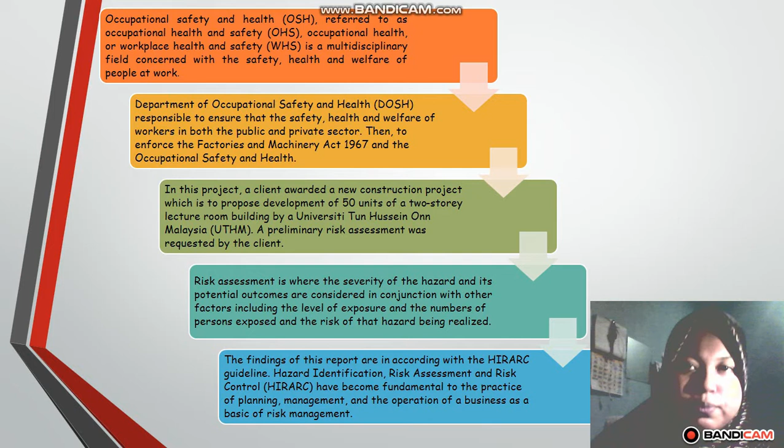Next, what is mechanical plant and machinery? The difference between plant and machinery is that generally machinery will have moving working parts while plant will not. So the proper selection and planning of equipment is important for timely completion of the project within plant cost

and for increasing profit and margin. Using machinery and work equipment exposes workers to multiple risks. Ensuring machine operator safety requires measures as effective as possible for the workers.

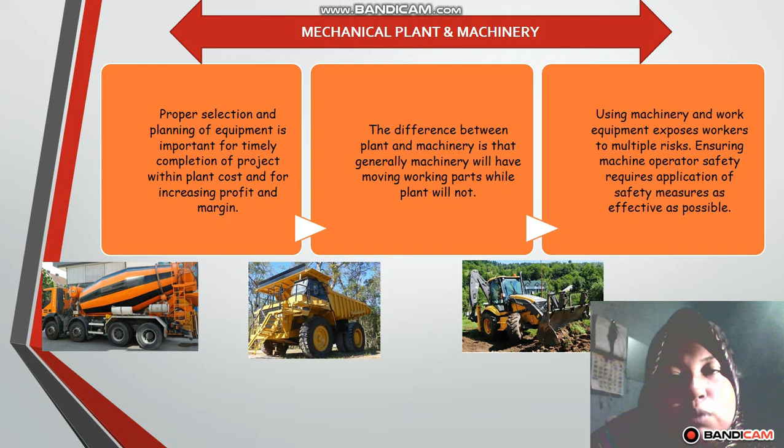So, next, the objective for our project has 3 parts. The first part is to identify the type of safety and health hazards that can be found in a construction site for mechanical plant and machinery. The second part is to provide a preliminary risk assessment of identified safety and health hazards. The last part is to recommend the appropriate risk control to ensure the safety and health of workers.

Okay. For our project, the problem that we found is that a wide range of mechanical equipment is used within industry. Examples include power presses, cutting tools, planers and routers.

There are significant risks associated with using machinery and equipment, and injuries sustained because of unsafe use of plant tend to be severe. With better preliminary risk assessment and risk control in accordance with the hazard identification, risk assessment and risk control (HIRARC) guideline, hazards can be recognized, controlled and incidents in the workplace reduced.

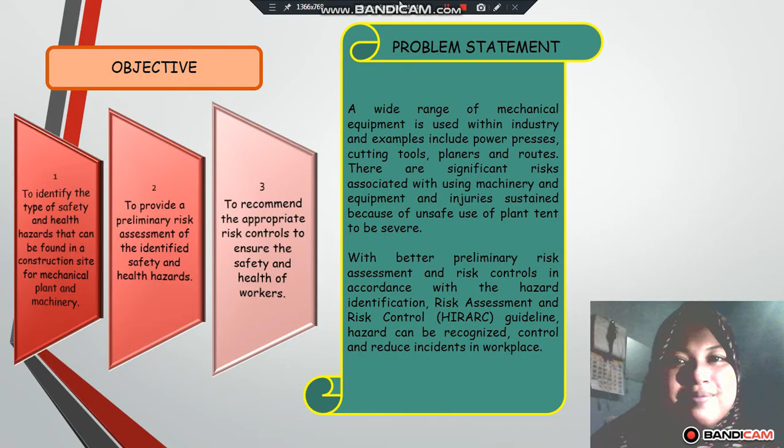I would like to explain about heavy equipment inspection. So what is heavy equipment inspection and why is it important? Heavy equipment inspection is a process including manual, mechanical and computerized systems which inspect whether the components function properly to the specification. Why is it important? Because it prevents accidents and injuries occurring in the construction site.

Moreover, it will identify whether the machinery is in good or bad condition before the start of the project, to keep workers under safe conditions, and finally to keep the working environment in good condition. The working place is stable and no accident occurs.

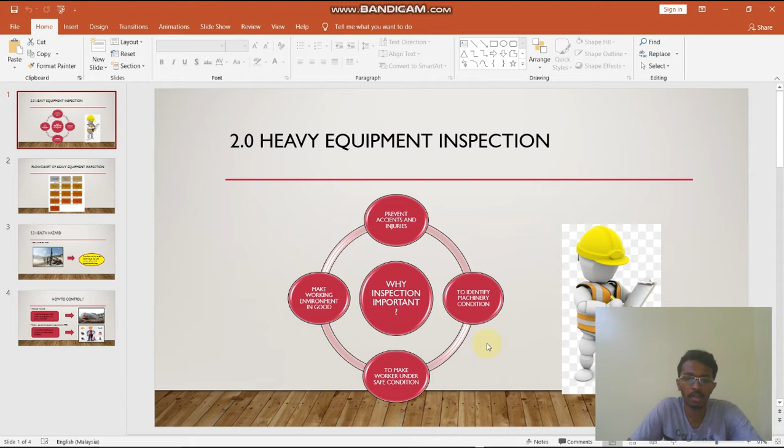So next I will explain the flow chart of heavy equipment inspection. Machinery inspection is very important and crucial before starting any project. Without a proper inspection, the machinery will not be safe to use and can cause injury or be fatal to humans due to accidents. This flowchart shows some steps of inspecting machinery before and after.

These are some examples of the inspection before and after. Look around the machine for visible leaks, inspect the tires, check the fluid levels, remove any dirt, check hydraulic pressure, hand over to the operator, check the operator controls and warning lights. So when conducting an inspection, we need to consider all problem causes to avoid any problem occurring in the construction site.

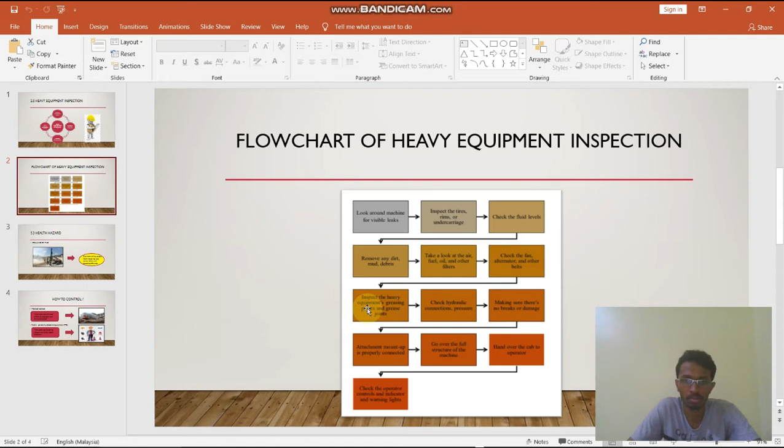So I'm going to present about the methodology of project part 3.0 until 3.5. So we are going to start with the risk management. The basic principle of risk management is to integrate risk management as part of planning at all levels of business, accept no unnecessary risks, make risk decisions appropriately, and manage the risk.

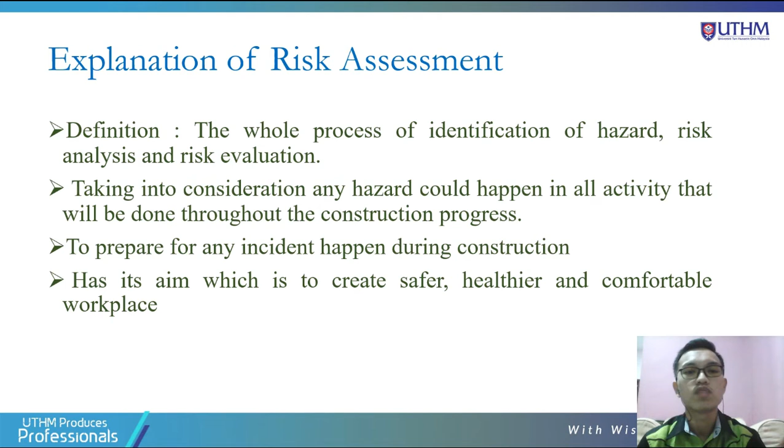Second part is the risk assessment. Risk assessment is the whole process of identification of hazard, risk analysis, and risk evaluation, taking into consideration any hazard that could happen in all activities done throughout the construction progress. Risk assessment also is to prepare for any incident that happens during construction. It also has an aim, which is to create a safer, healthier and comfortable workplace.

This is the general flow of risk assessment. Step 0 is the preparation for risk assessment. Step 1, hazard identification, creating accident scenario. Step 2 is the risk estimation, which is considered in the risk analysis. And then, is the risk acceptable? If yes, then we can summarize the risk assessment. If the risk is not acceptable, then we need to develop risk control operation and study the assessment of risk control operation.

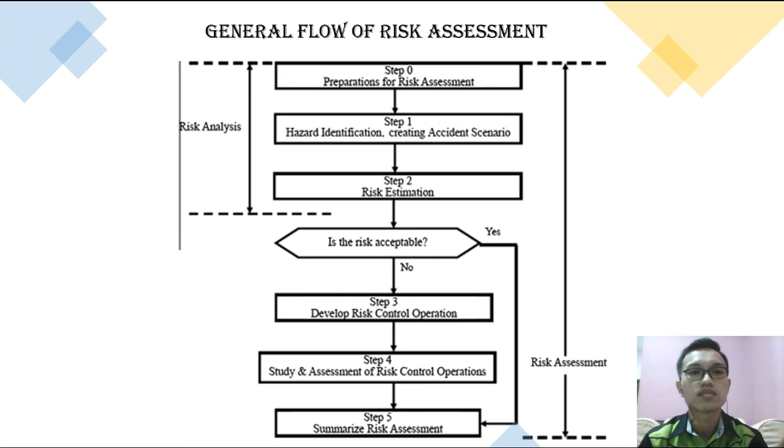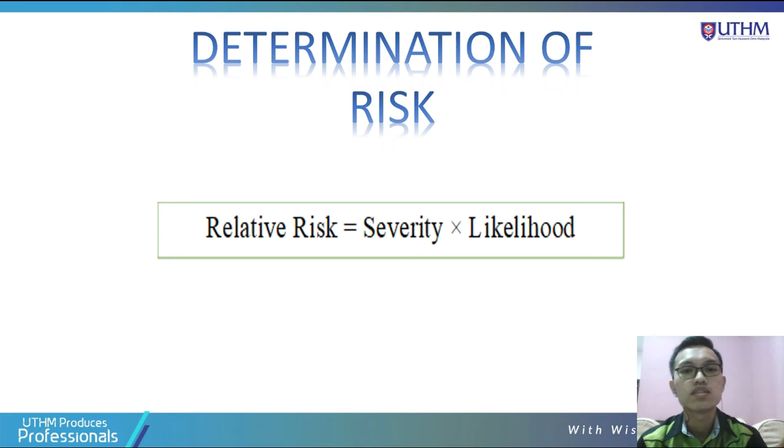Next part is the determination of risk. This is the formula to determine relative risk: risk is equal to severity times likelihood. The next part of this methodology is the severity of risk. The severity consists of 5 parts, which are catastrophic, fatal, serious, minor, and negligible. For example, a catastrophic event is numerous fatalities, irrecoverable property damage, and productivity loss. The rating is 5.

And then the likelihood of hazard. Likelihood is the chance or possibility that an event will occur. Likelihood is ranged by 5: most likely, possible, conceivable, remote, and inconceivable. The example for most likely is the most likely result of the hazard or event being realized, with rating of 5. Possible has a good chance of occurring and is not unusual, rating of 4.

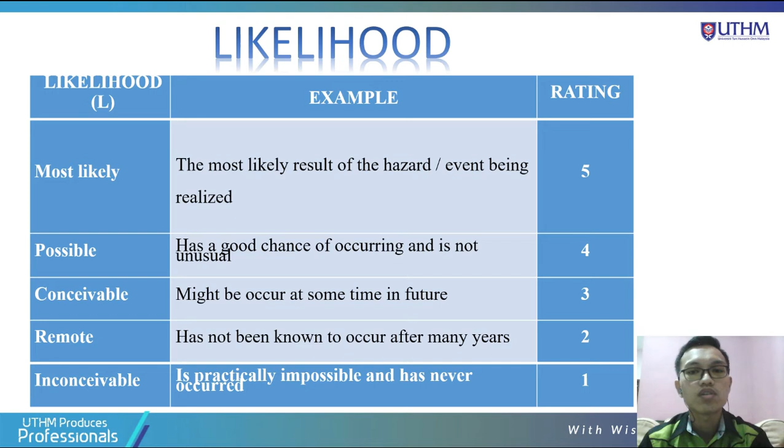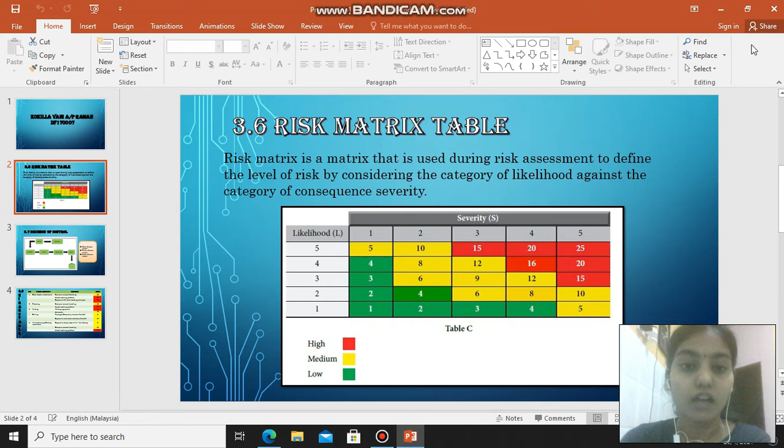A risk matrix is a matrix used to define the level of risk by considering the category of likelihood against severity. The value is gained from multiplication of severity and likelihood. The range of 1 to 4, which is green, is identified as low, and further reduction may not be necessary. For the range 5 to 12, which is yellow, it is identified as medium risk, which requires a planned approach to control the hazard and apply temporary measures. For the range 15 to 25, it indicates high risk, which requires immediate action to control the hazard.

For the decision of control, the decision process is where risk is a dominant issue and planning does need to have a guideline on the tolerability of risk. Usually, the design of control will refer to the guideline from here. There are 3 ways to control the risk. First is most effective control, which is elimination of hazardous jobs. Second is fairly effective control, which is substitution, isolation, and engineering protections. Third is least effective control, which is administrative control by changing the procedure, or PPE use as additional protection.

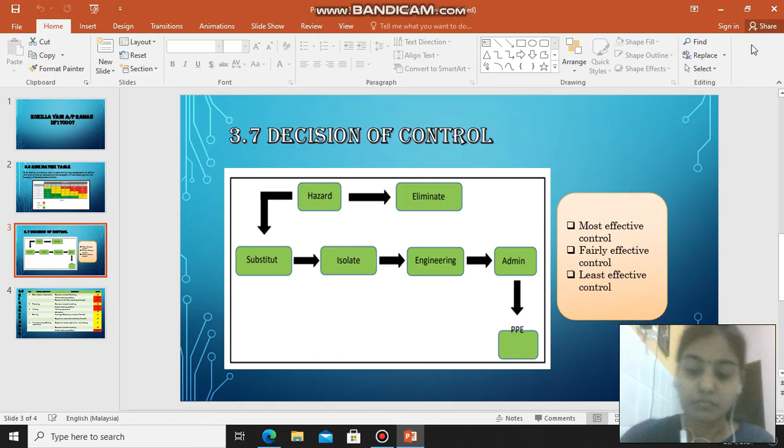In this project, we have identified a few work activities that cause hazards to humans. The risk level has been identified. All the risks are in the range of medium and high, which require planned and immediate action to control the hazard.

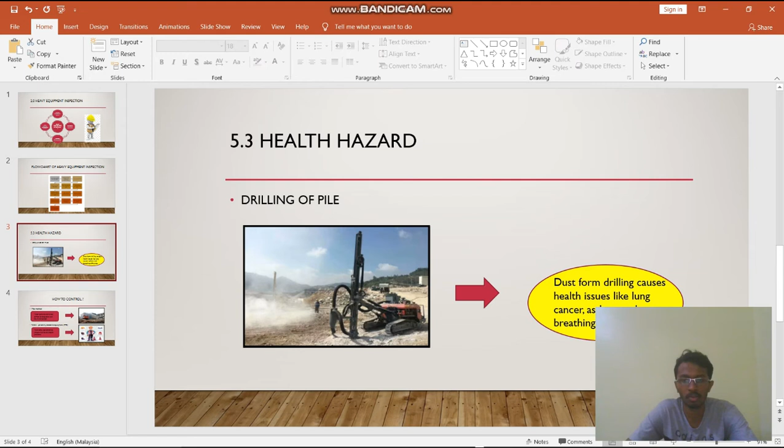Next is following personal protective equipment. Wear safety equipment to prevent injuries and health problems, so workers should wear a mask in this case, to prevent this type of problem. Thank you.

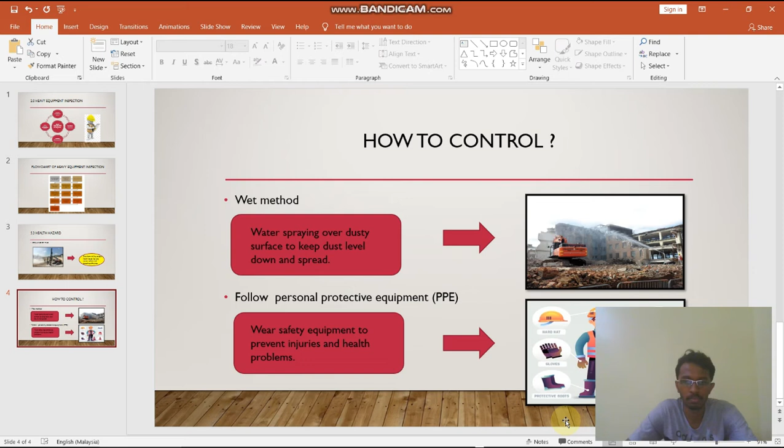Furthermore, I'm going to explain about safety hazard, which is fall hazard. The danger of falling is anything in the workplace that can lead to accidental loss of balance or body support and result in a fall.

OSHA generally requires fall protection at a height of 4 feet in general industry, 5 feet in maritime, and 6 feet in construction. Fall protection must be provided while working on hazardous equipment and machines.

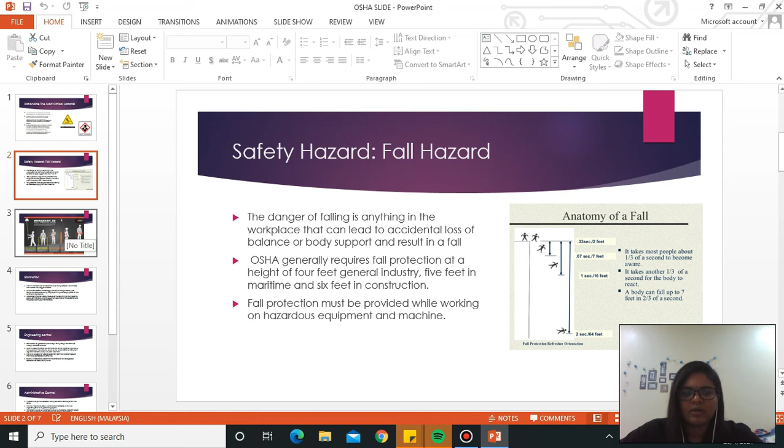Next, I'm going to explain the hierarchy of fall protection. First is hazard elimination. Second is passive fall protection. Third is fall restraint system. Fourth is fall arrest system, and fifth is administrative control. This is the step for fall protection.

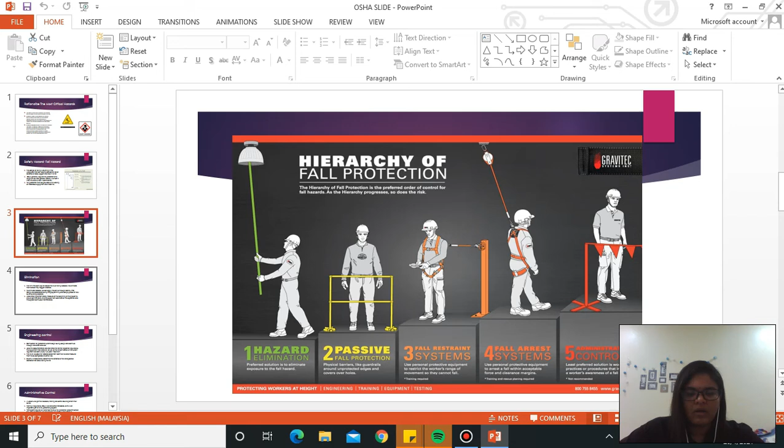First, I'm going to explain elimination. The best way to reduce the risk of fall hazard is to eliminate it before it happens. Before the hazard or accident occurs, it's better to eliminate those hazards. To eliminate hazards, we can apply preventive measures through identifying, designing and addressing issues during the programming and design phase of new buildings and processes. By this, we can identify those hazards during our work period or at our workplace. Assess and implement safety measures at the beginning of the project to ensure optimal safety for employees, from construction into operation, through continuous maintenance.

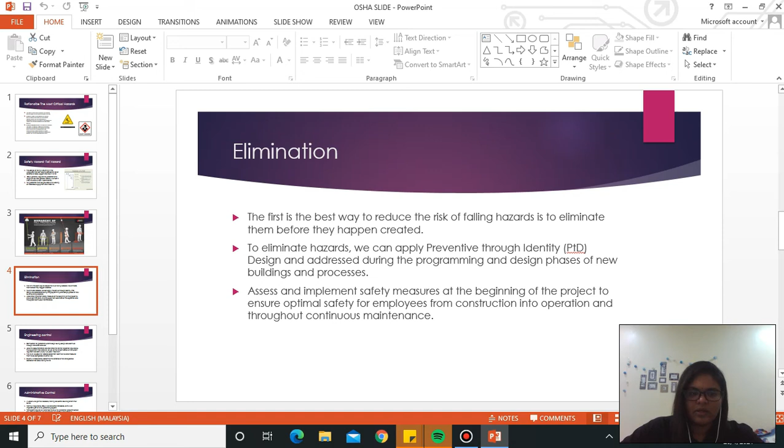Next, I'm going to explain about engineering control. Engineering control is about certifying the fall protection system, beginning during design and continuing through installation and use. This documentation also facilitates the formal inspection required by the equipment manufacturer, as well as the re-certification of the system required by ANSI Z359.6, every 5 years maximum.

The risk evaluation of fall hazard assessment identifies risks and measures them to compare to other risks. Severity is measured by determining the distance of the fall and possible obstacles that occur during the fall.

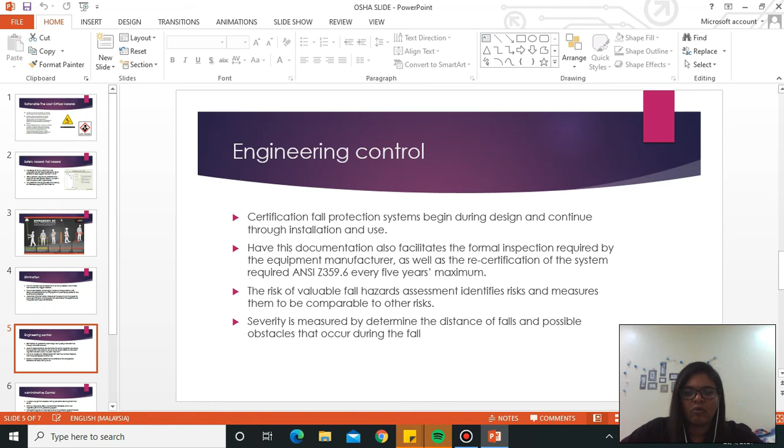Next step is administrative control. A worker who gets necessary training is better able to perform their duties. Before the worker starts work, they should be well trained in their field to avoid any accidents happening. Training is required by OSHA rules and other standards, so this is an important part of the fall protection program.

Participants require skills and tools to solve fall protection problems before they arise, so that they do not depend on a less effective and reactive approach in the field. Continuous training support is another key element of the fall protection program, increasing the effectiveness of each step. If workers go through continuous training, they will be able to do their work without any accidents at their workplace or during their work period.

The final step is personal protective equipment, PPE. When engineering control is unworkable or impractical, such as in construction or maintenance projects, personal fall protection systems or equipment, PPE, are used. A work positioning system keeps the worker from entering a dangerous position where a fall could occur, and also allows hands-free work. Both systems have three components, namely harness or belt, connecting tool, and fastening point. This is the equipment that workers should wear during their work to prevent or avoid any type of fall that may happen during their work time.